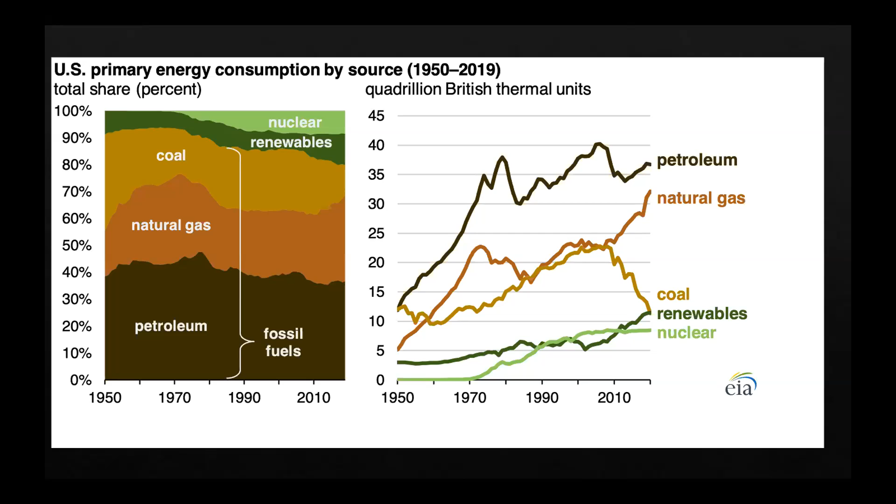I need to find some more current information. But again, you can still see that renewables are a fraction. The good news is, look how far coal is dropping, coal is starting to drop off. But we're still fairly dependent on petroleum and natural gas to have a sustainable and regular use of energy.

And this is where we are today. We all know this. Power plants are using petroleum, natural gas, those sort of things to create power. And as we just experienced this winter, dependable power.

There's been a lot of conversation, and you hear it on the news media and around the country: Texas has so much dependency on renewables, that's what it was, it was the renewables that failed. No, well, yes, our renewable sources in terms of wind did fail. But the reason the wind failed had nothing to do with the technology of the turbines.

It had everything to do with deregulation and the fact that the producers were not required to provide winterization. That's why valves froze up on the natural gas pipeline, and that's why the turbines couldn't run.

It's just like an airplane wing - the turbine blades ice up, you have to shut them down. They start to cavitate, and the next thing you know, you've got turbines falling to the ground. So they had to shut them down because they were icing up.

Now, I don't know if any of you have been to Copenhagen, but they have a line of wind turbines that go all the way out Copenhagen Harbor. And that harbor is subject to temperatures as extreme as what we experience, perhaps more. They don't have any problems. Well, it's because they have winterization on those turbines - it's called de-icing. So it wasn't the technology that was the problem.

It was the fact that deregulation allowed the producers to say, well, we've never had a freeze, we don't need to provide winterization. Well, we just had an event - I think it was maybe a 200-year event - but the point is we had an event and things froze.

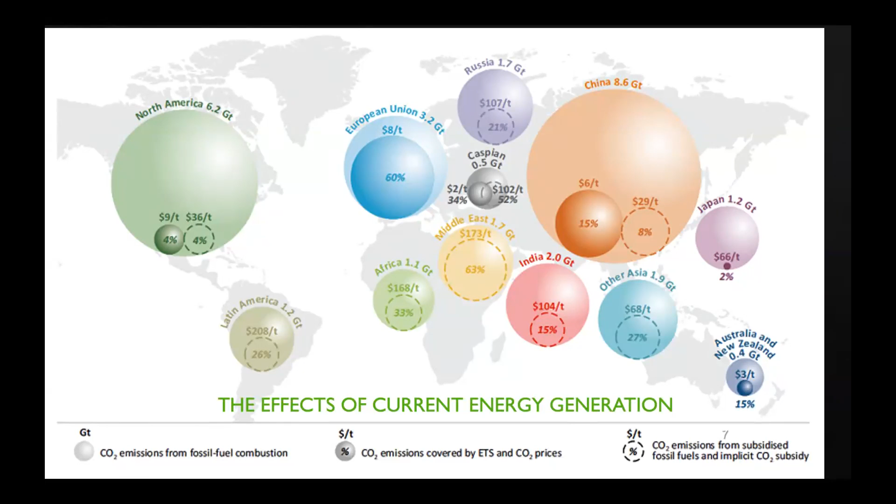So the effects of our current energy generation, this gives you an idea - this is CO2 emissions around the world. And you start to look at this and it's even larger now. You really get a sense of what is going on with all this CO2 we're pumping into the atmosphere. And you can see who the biggest players are - clearly China, the United States, European Union, Russia, and India are the biggest ones.

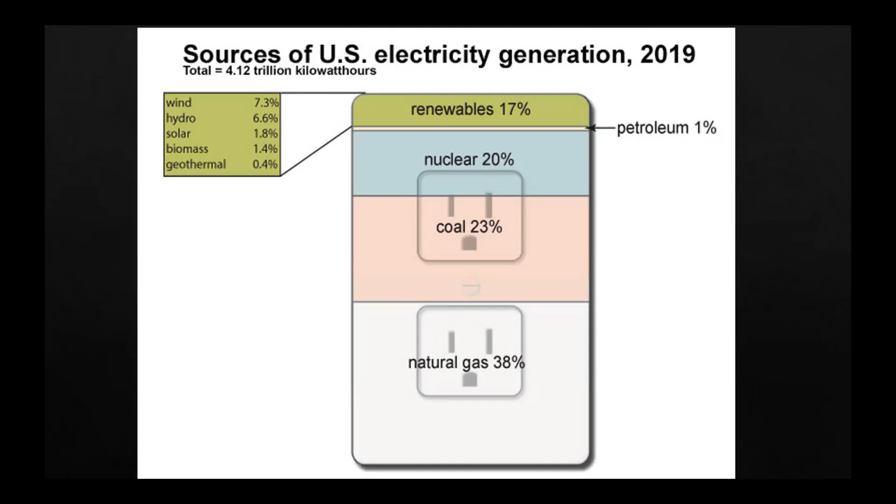This is still a 2019 piece of data, but the renewables have popped up - you can see we're up to about 17%. I think I read a couple days ago we're like 18.5. Nuclear is pretty much the same. Coal, again, is dropping, and natural gas and petroleum sources are still pretty significant.

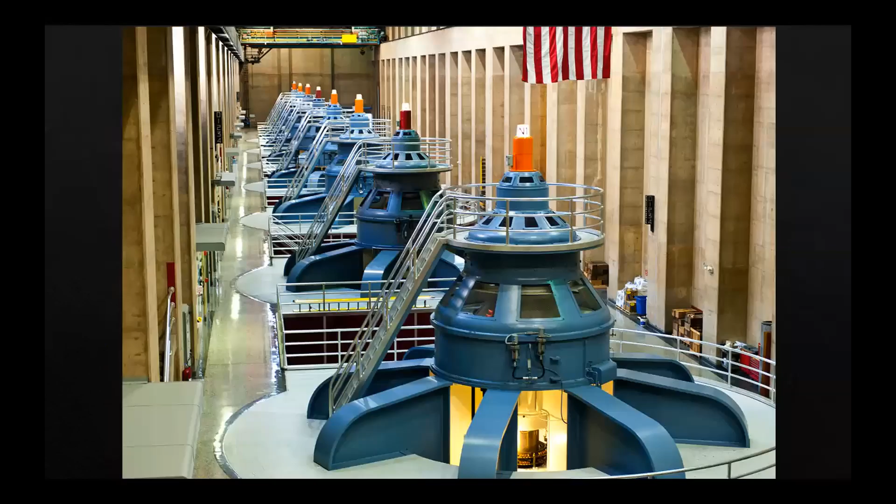So the promises are renewables - renewables can lead us to an interesting future, can lead us to a cleaner future. Oh, go back. Hang on, there we go, now it's working. So the renewable horizon, I think, is important.

When we think about it, for the last 55,000 years, the human race has been primarily challenged by and focused on producing food and clean water. So in the last 200 years, we've created all this wonderful technology, the Industrial Revolution, and we've powered that with fossil fuels. Exponentially, our population is growing, and exponentially our energy demands are growing, and our technology for renewables isn't moving as fast as we'd like.

But the good news is, I guess the best news is, it gets a little better every day, and we have to stay focused on that.

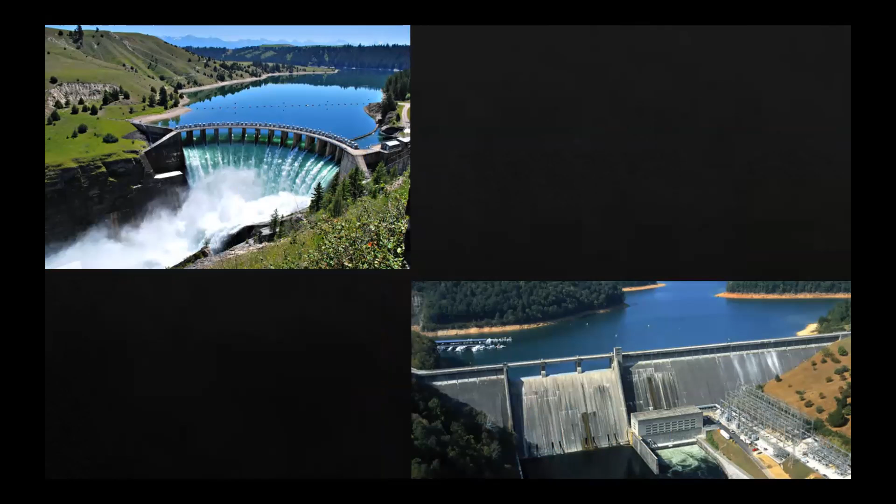Wind, as I shared before, is tremendous. Hydroelectric energy is great too. Each of these has challenges. With hydroelectric, we're disrupting migration patterns of aquatic life, and we're causing some downstream problems. Again, we're learning as a species how to generate power using hydroelectricity in a way that's not as damaging, and this is how we do it.

I read an interesting note the other day that Frank Lloyd Wright was an adopter of technology. He burned 3 houses down because he didn't understand electricity. But the neat thing about Wright was he actually had one of the first electric generators powered by water. He had a fairly large mill creek that ran next to his home. He built a mill pond and installed an electric generator, one of the first in Wisconsin. He'd love to go out and putter with that generator to keep the electricity going. I thought that was a pretty fascinating thing about Wright.

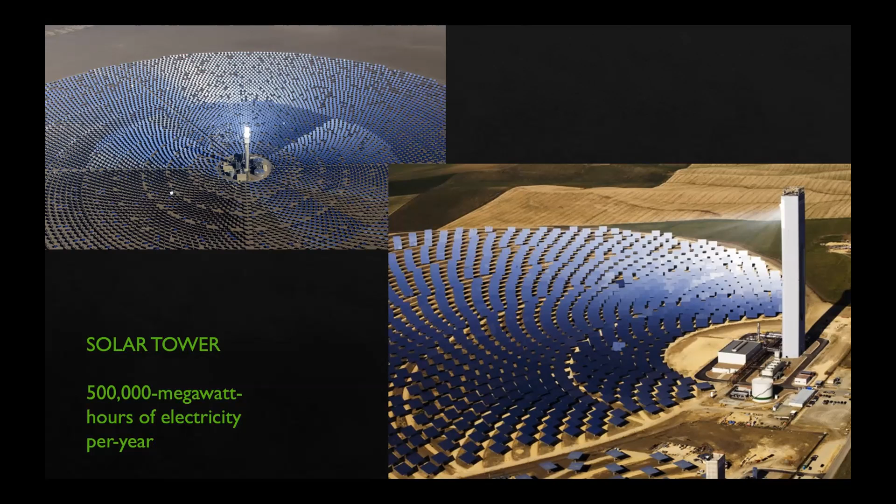You can generate electricity, but again, let's talk about what that does to the wildlife. The desert's not dead - there's a lot of life in the desert, a lot of biomass. So that's another consequence of thinking along those lines.

Nuclear is certainly an option. It's clean, though there's of course debate about that. I heard a presentation from a 4-star general very involved with the nuclear energy commission, who told me about exciting developments - new reactors designed that can virtually use the waste fuel already stored, incredibly safe, with very little fuel, and they can create energy. But the public consciousness is so against it. These are just models on a drawing board, and the funding and regulation hurdles are significant.

So we're hearing a lot about this today as we get into the future of transportation, which is EVs. EVs are everywhere - you hear it from Ford, GM. This is a revolution to move away from gasoline for personal mobility on a scale that's phenomenal, almost as phenomenal as smartphones. But again, when I talk about that exponential energy demand growing every day, EVs are great, but how are we going to provide the power? We still have to plug this thing in.

You talk to people getting an electric car and I'll say, hey, that's great, I think EVs are great, I have one. But do you ever think about where you get the power for these charging stations? Oh, well, you just plug your car into it. But how do we get the power to these charging stations?

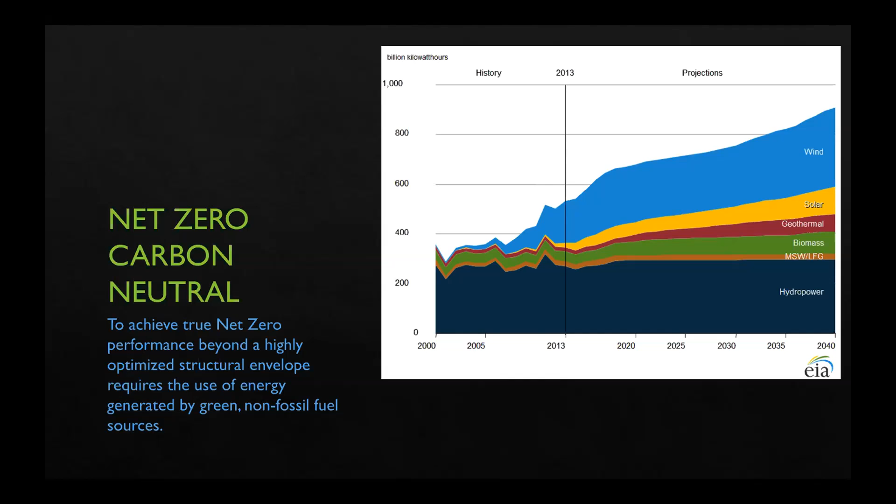This is another chart that gives you an idea of the projections. Here's 2013, you can see 2040, and you can see wind taking a bigger role, solar incrementally increasing, and then the rest, hydropower. This is just renewables.

So the reality of all this means it's probably one of the most exciting times to live in. We're looking at how do we create energy in a clean way? How do we make renewables work? How does this all fit into an equation where we can address the exponentially increasing demands for energy? It's going to require much, much more than renewables. Energy independence, eliminating fossil fuels, reversing climate impact will require a holistic, sustainable approach.

People talk about this, and I love this shot, growing trees for the future. It's a little tree farm that I have, and we grow some trees. Trees are great. I think we can plant lots and lots of trees. That'll help us offset climate change. And again, it's something very simple most people can do.

But trees aren't the only answer. They sequester a great deal of carbon, but so do the oceans, with detrimental effects. But grass, just grassland prairie, sequesters more carbon than even trees do.

It's an effective approach to sequester carbon, a way to try to mitigate climate change. But what is it? It's not a solution, it's a Band-Aid. What we're trying to do is plant trees, lots and lots of trees, to mitigate, sequester, and store all of the carbon we're dumping into the atmosphere by burning things.

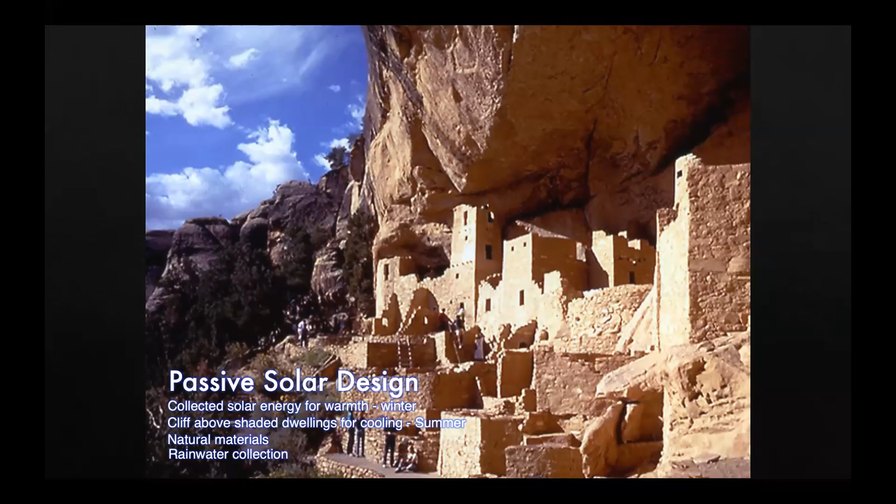So they basically ate the environment away, and they cut all the timber to build these roof structures and for cooking. They altered the environment to the point where it could no longer sustain the population. So while they were natural geniuses in terms of heating and cooling, water collection, on the other side of it, bad farming practices, harvesting practices, and lumber foresting practices destroyed their civilization.

The thing that I always talk about is, where is the sun? Some of you may already know this, but passive solar design is knowing north, south, east, west, shading, natural ventilation, daylighting. All of these things can reduce the amount of energy it requires to heat and cool a home or light a home tremendously.

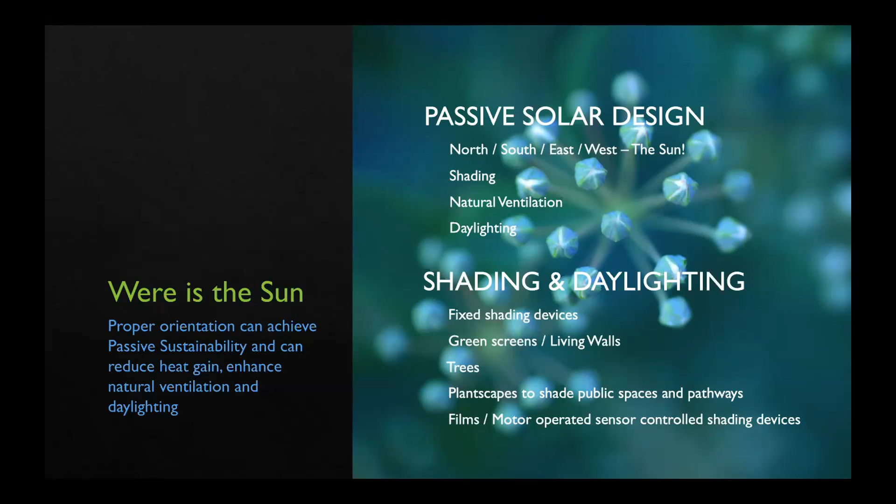Shading and daylighting are tools in my tool bag - fixed shading devices, green screens, living walls, trees, knowing where to plant trees, plantscapes to shade public spaces and pathways. How many of you walk across a parking lot to go to class or work, and you cook? Your shoes get hot because you're walking against a gigantic thermal mass that's collecting all that heat.

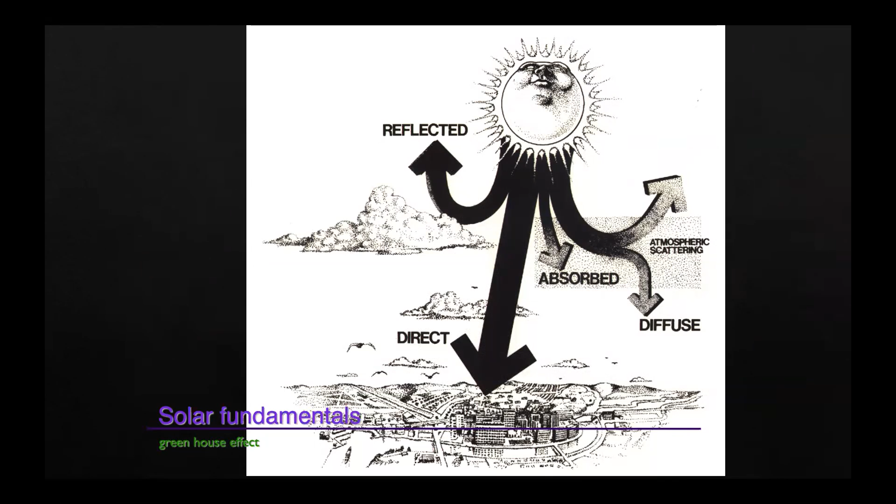This is pretty simple stuff, we all know this - sun shines, windshield heats up, cars burn when you get back in. Sunshine is kind of diverse - some of it's direct, some is absorbed, some is diffused, some is scattered, some is reflected. Knowing how much you can collect and how much you can reflect, and how all those things impact us, is where the engineer or scientist part comes in.

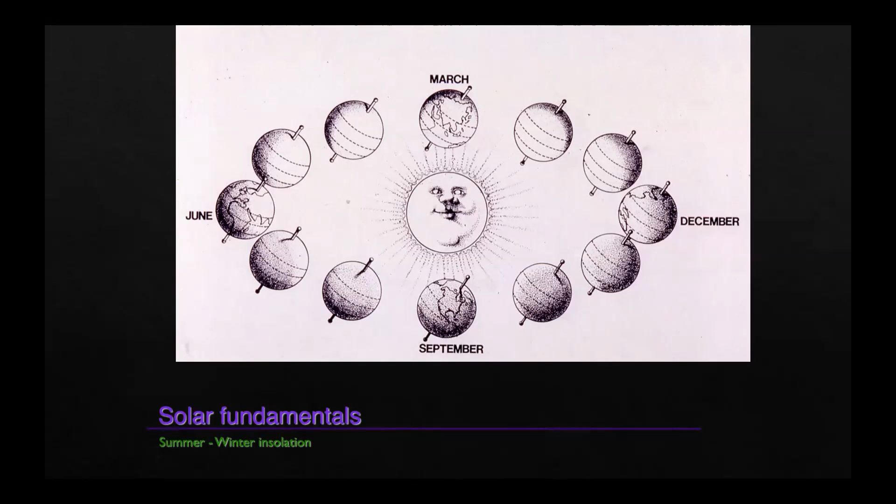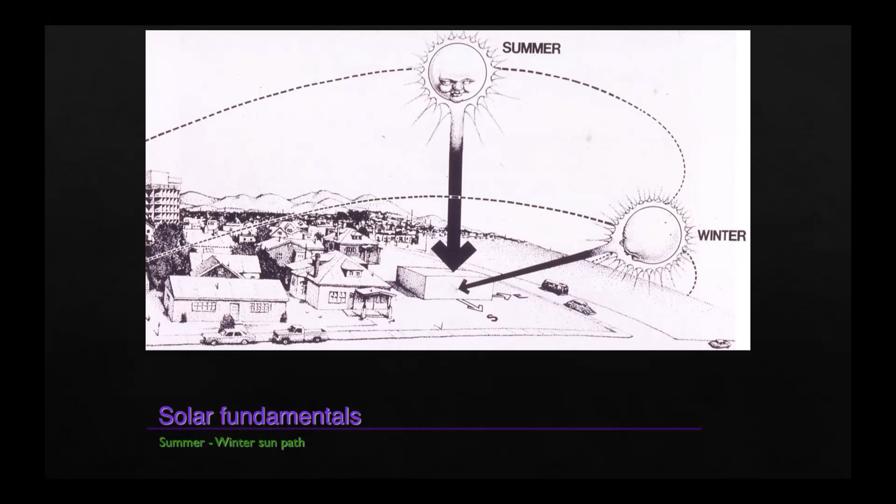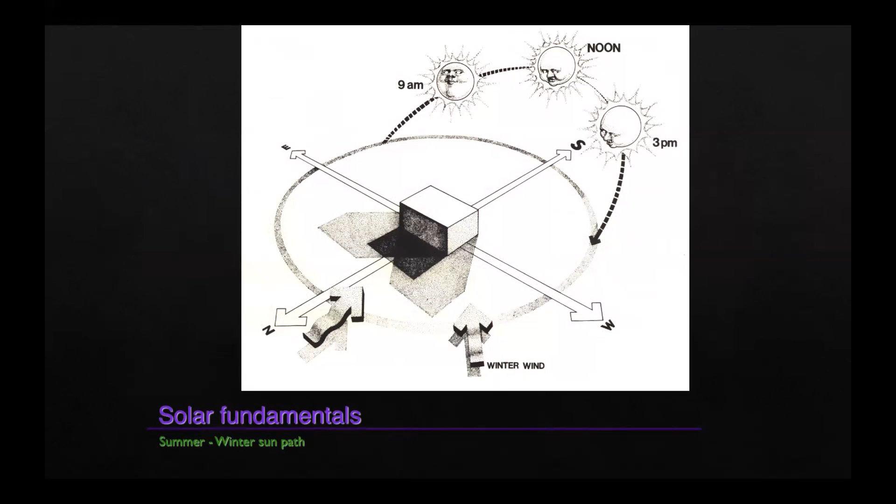This is the simplest diagram you'd ever see in terms of what happens with sunshine and how it impacts our built environment. If you pay attention to what the sun does - where is it in the sky, how high is it, how far does it reach to the right and left, where's shade and shadow - the sun is effectively a constant, and that's what we use to work with our buildings to reduce the amount of energy required, have better daylighting, and mitigate the interior environment.

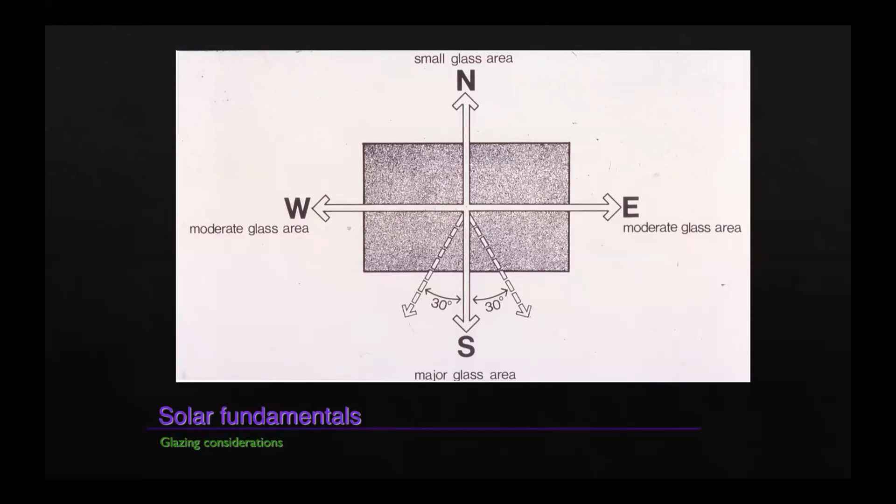This is probably very rudimentary, but it's true - you put a small amount of glass area on the north, and this works in the northern hemisphere, it's reversed in the southern hemisphere, but it's the same principle. You can see where you put moderate glass, and where you put a lot of glass.

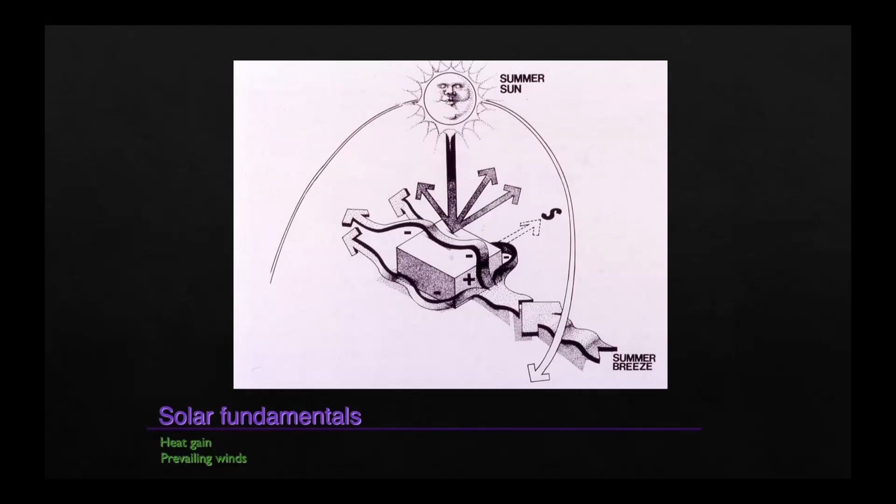These are the other impacts you start to think about, like wind. What's interesting is with our built environment, particularly in a dense urban area like Dallas, we've altered the wind patterns. If you go north up to Denton and further, it can be 105 degrees down here because of the heat island effect, and also the wind doesn't move through here. If you go up north, it's a lot cooler and there's a breeze because they've mitigated two things: the heat island effect, and they're not blocking the natural wind patterns.

So put that together for a building, and these are the kind of influences we work with every day: how much heat loss, how much heat gain, how much daylighting.

Pretty simple, really, and this is the simplest concept of all: shading. If you take advantage of the fact that the sun is almost vertical in the summertime, and lays down to our latitude about 32 to 34 degrees in the wintertime, you can use that to your advantage. So if you keep the direct sunlight out of your building, out of your windows, you're not gaining all that heat on your thermal mass. And in the winter, you let it in and warm it.

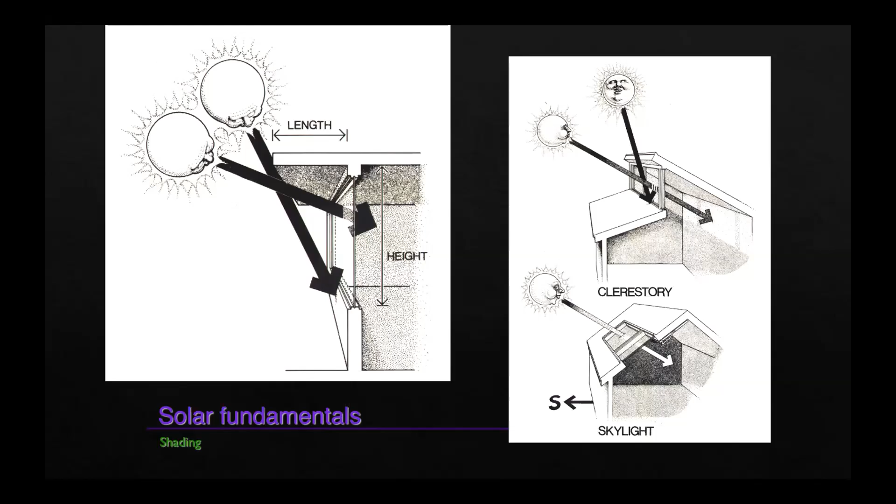Some technologies work better in certain climates than others. For instance, in Dallas, skylights are horrific. You just can't control the amount of heat gain that comes through skylights. I love skylights, but they're a very difficult thing to use. There are technologies we employ that do work, but north of us, north of the Mason-Dixon line, skylights are great. Here, what works better for us are clerestories. So very simple, very basic techniques.

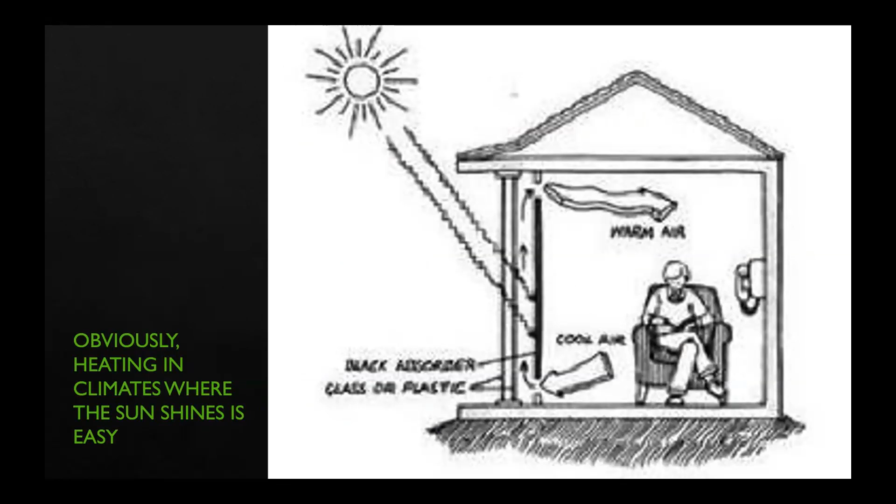So in climates where the sun shines, heating is easy. This is basically a sketch of a trombe wall. Sun comes in, passes through the glazing, just like your car window, hits a heavy thermal mass, and you get cool air coming in the bottom, warm air out at the top. It's called a trombe wall.

The other thing I want to talk about, and we'll go back to the trombe wall in a minute, is Iceland. When we talk about renewable energy, Iceland is on the verge of being completely energy independent with a renewable source, and what is it? It's geothermal. This is the Blue Lagoon. If you've never been there, I recommend you go. You can move around in the Blue Lagoon. Some areas are so hot you can't even go into, and other areas are just amazing.

They have these hot pots all over Iceland, and I visited several of them. They're really fun. The benefit Iceland has is sitting on three major tectonic faults, giving them the tremendous advantage of tapping into those faults where you basically have magma down there, and they have hot water geothermal vents everywhere. It's pretty amazing to see they generate virtually all the electricity for Reykjavik and the other major cities from these geothermal sources. It's wonderful that Iceland has that ability.

But here in Dallas, we're not sitting on any tectonic faults, so we really can't take advantage of it. But again, what are they doing? They're not burning anything, but the core of the earth is so hot that they produce steam a different way. They tap the geothermal vent, create steam, and make the turbines turn.

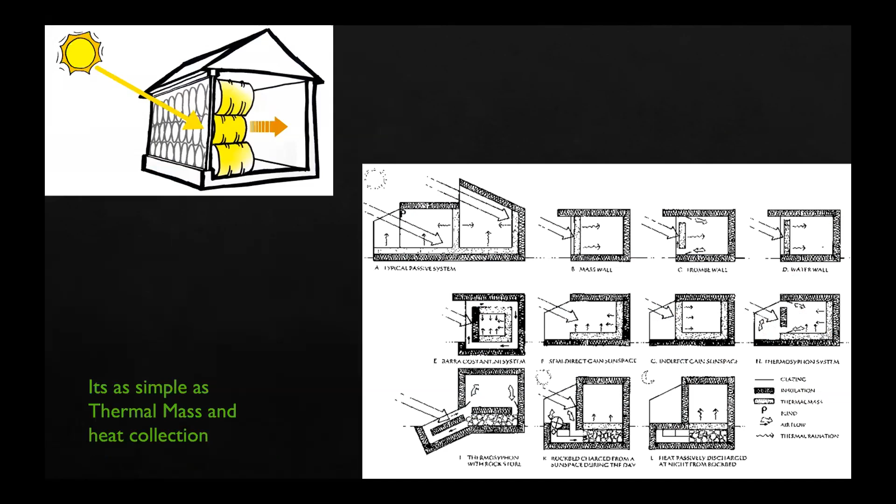So this is the trombe wall I talked about. This is a sketch in the lower right that I've done. When I was much younger, in '77, I experimented and built many examples of all of this. Effectively, here you see it again: it's as simple as thermal mass and heat collection. Works great in cold climates.

The trouble I soon discovered was that the best light coming into your home, the thing that makes a home comfortable, feel good, just a pleasant place to live, is the sunlight and daylighting that comes through the windows. When you put windows on the north, the east, or the west, that's problematic in a lot of climates, depending on what you're doing, and the bottom line is you have to add lighting to light up the dark space.

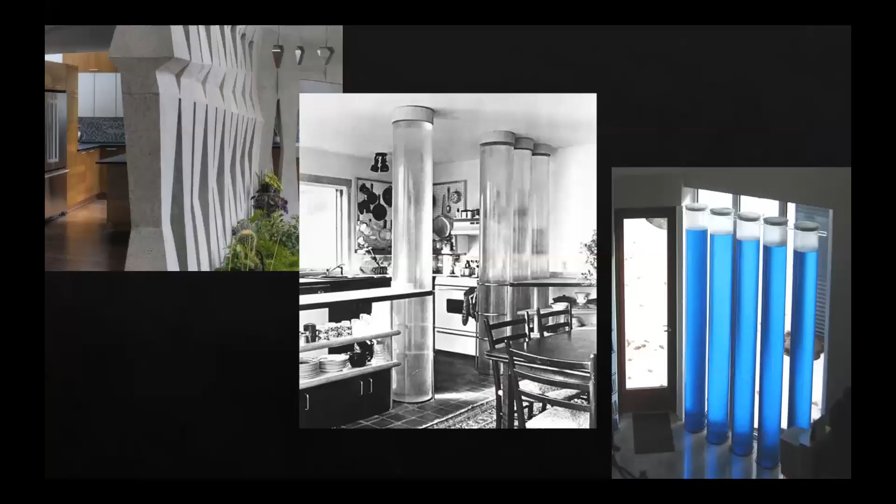This is kind of a hybrid that I did once. I put little glass blocks in the wall, and it worked, but you're still facing that heavy mass. These are some other examples where you can use tubes of water, let the sunlight hit that, warm it up, store it, and reintroduce it.

Now, Amory, I don't know if he talked about it in his presentation, but he talks about how he harvests bananas in the middle of winter at his place in Snowmass. What he has is a modified trombe wall. He has a greenhouse that you see on the left. He collects the heat and uses it to condition most of his lab up there, and he can grow bananas in his greenhouse. Again, that's an extreme northern climate, and it works great.

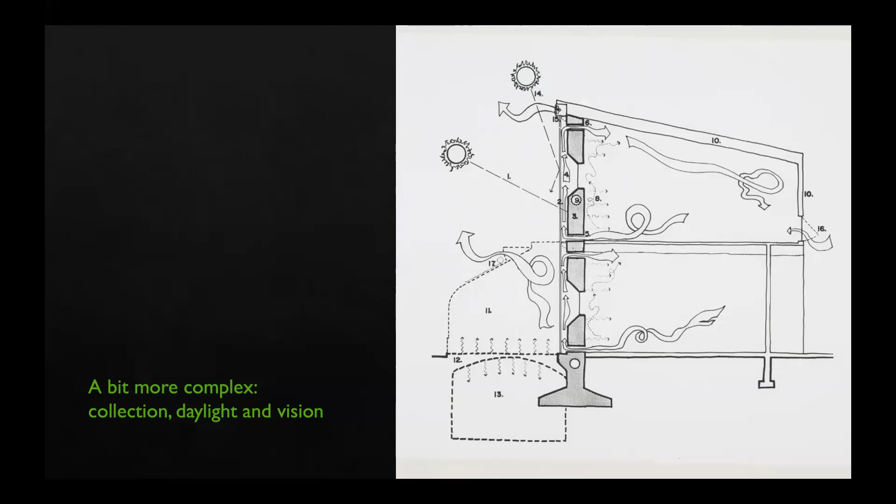Well, we've got the exact opposite problem in Dallas. We have the issue of cooling. We get too much heat. This is something that's pretty interesting, it's a trombe wall, just a modified, more creative way to think about it. You create a thermal mass behind the glazing and use it that way.

Now, some things that we've played with, not to great success yet, is can we collect that heat and extract it out of that wall, doing what's called a conductive cooling mechanism. You put it in a masonry wall or something like that to absorb the heat, or you pump coolant through it to cool it and take the heat out.

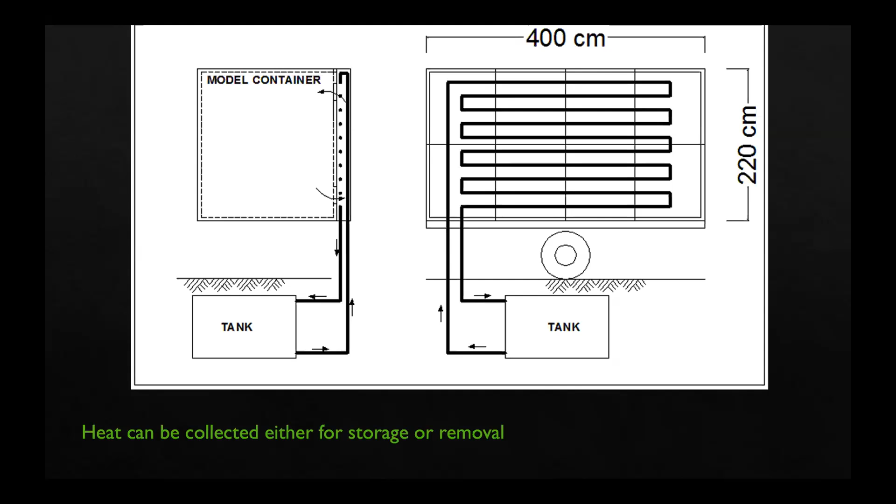Again, this is almost going back to those early days when we were doing solar panels, pumping water through them on roofs, and you had to be a master plumber to condition it. So I think there's opportunity here. We're working on it with different refrigerants, seeing if there's a way that we can actually make walls and floors conductive to extract the heat out of the air.

So when we talk about buildings, and I won't get into too much of this, this is more about the way that we approach a building, whether it's a small home or a large facility. Where we start is baseline modeling, and we really look at that building, how much load, and what do we need to do to offset that load.

You've got to deal with cooling, lighting, plug load, and additionally people load. One of the biggest demands in buildings that you have to offset by generating electricity, again either more solar panels or more energy of some kind, is us. We're little, remember that movie, The Matrix? We're copper top batteries. We're generating heat all the time, heat and moisture.

And so when you design a building, several things impact it. You have to take into account the amount of heat introduced by humans. We're a chemical engine, we're burning food all the time, so we're doing the same thing as we do to generate electricity. We're burning this fuel inside ourselves, creating heat, and then we off-gas carbon dioxide.

All of those things affect the indoor environment, along with heat gain and the need for lighting and plug loads to run all our great technology, like our computers and smartphones. So one of the things we've done recently in buildings is the building codes are catching up pretty quickly. You had to provide, I think it's 16 or 17 cubic feet per minute of fresh air introduced into a building. Again, I'm not an engineer, I hire my engineers to do the numbers for me.

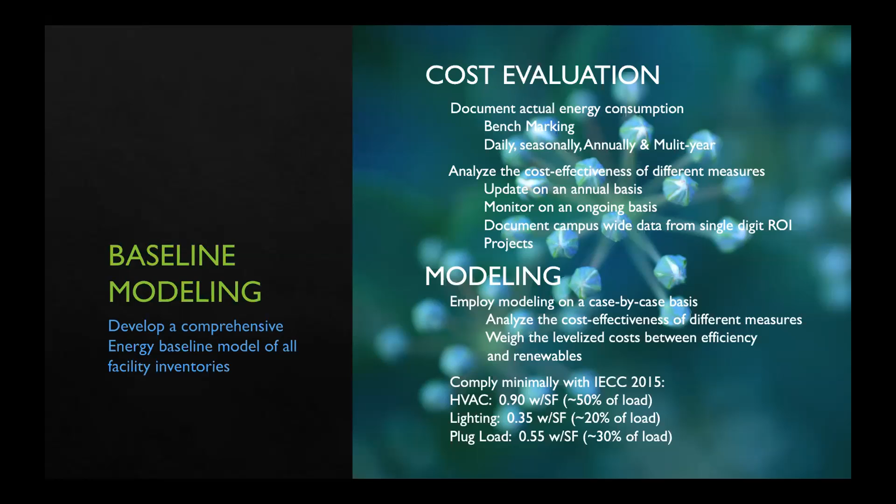So that is one of the biggest loads on any building, fresh air. If you can modulate that with controls and smarter systems, what have you done? Well, you've reduced the energy demand of that building. Now you don't have these units sucking in all that energy to create all this excess cooling to dump fresh air into a building where it isn't needed. So it's about getting smarter.

Insulation - we still don't properly insulate our buildings. We've come a long way, there's a lot more technology, some great new products on the market. I have been wrapping my buildings with a full 1 to 1.5 inch rigid insulation on the outside of the sheathing to create a completely sealed envelope, because you still get conductivity that moves through the framing and the walls.

You'll find even today, I run into old buildings that the city owns or private clients own, and I'll go up on the roof to see how much insulation they have. None. They've got what's called a recovery board - it's like a 3/8 inch to a 1/2 inch board laying on top of the steel deck, and then generally a dark roof sitting on top of that.

One of the things we've been doing for a lot of our clients is when they have a need to re-roof, we pull the roof off, we put R42 minimum on the roof, and then we use a white TPO membrane. That alone reduces the energy demand by tremendous amounts.

70% of the heat gain that goes into a building comes from the sun. So you can start to see that when you talk about things like reflective roofs, cool roofs, living roofs, insulation - all those things can reduce the amount of energy a building needs.

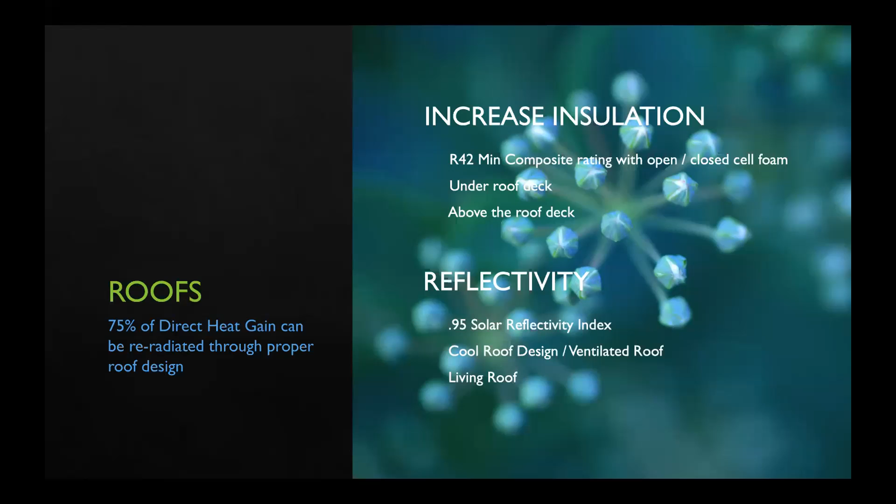So if you do that for one building and reduce its energy demand by, say, 75% - on residential projects we have pretty good luck reducing it down to almost 90% compared to a standard builder tract home - then when you look at the amount of solar PV you have to put on that roof, it doesn't take much to heat, cool, and power a building that's that efficient. Whereas the other building that's not efficient, you can imagine you're paying for a lot more panels, trying to generate a lot more electricity, consuming a lot more electricity.

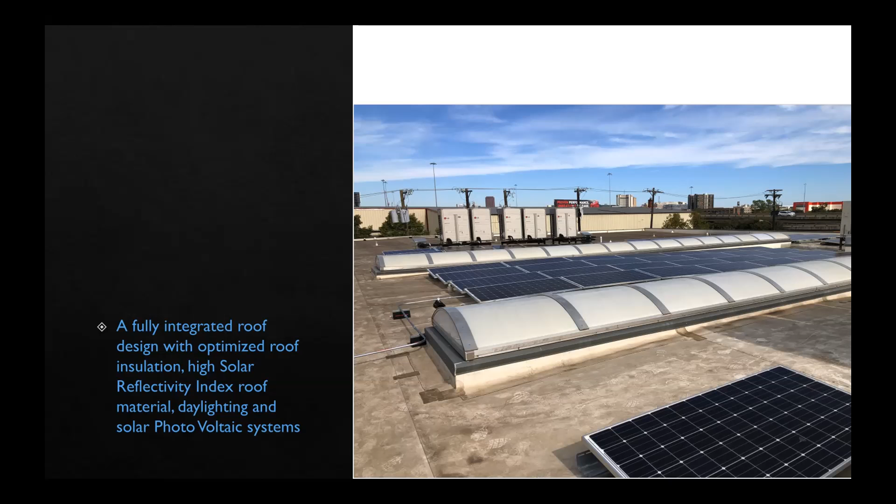We put an R46 roof on this, sitting on top of the concrete deck, then used a highly reflective membrane. That's one of the reasons we were able to realize a lot of the energy efficiency in that building.

Here's another aspect, something pretty important and pretty easy to do really, and that's living roofs. If they're done well, the darn things don't leak - it goes back to detailing, it goes back to craftsmanship, all those sorts of things.

The plants are actually absorbing it and then releasing it at night.

The other nice thing about living roofs is when you think about it, if you were a bird or a butterfly flying over the city of Dallas or any major city, you'd look down and all you see are these hot roofs with mechanical systems where there once was a living mantle of the earth. Every time we carve out a piece of that living mantle and put a hard surface there, we're exacerbating the heat island effect, creating another surface that's just going to store that heat.

Again, it's a trombe wall in the atmosphere. We're storing that heat. Well, where does that heat go? It only has two ways to go—it needs to go up or down.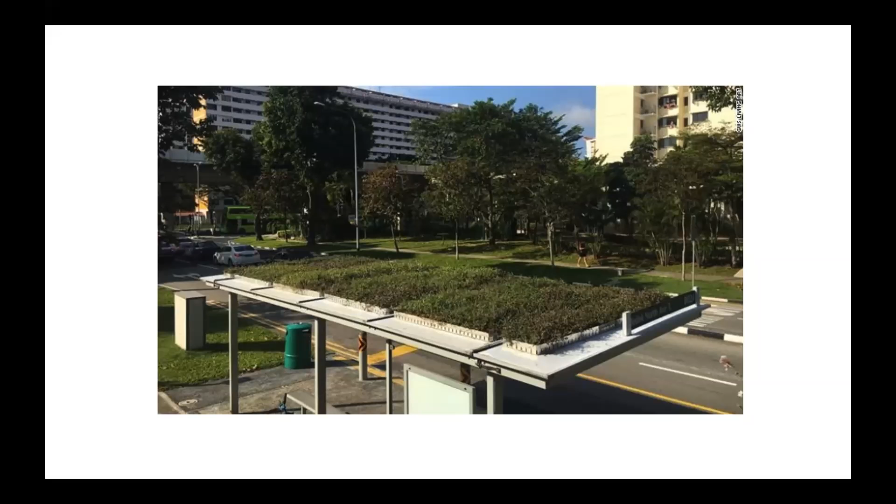Innovative things like this—this is just a little bus shelter with a living roof on it. This is, if you've ever been to San Francisco, I think Golden Gate Park—again, another living roof with skylights, and you can see the shading effect all around the building. Very efficient building. So these are some of the specifications that we use.

And I think over time, as technology improves and we get better glass performance, the U value and things like that will increase. We generally use thermally broken frames, which means there's no conductivity from the inside to the outside because there's a thermal break in the middle.

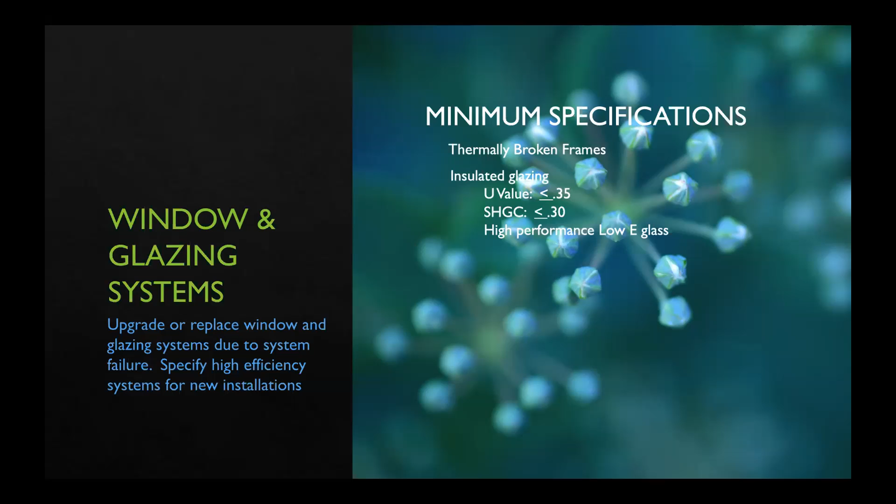When you look at a window frame, for instance, you would be shocked by how much heat goes out of your building in the wintertime through those frames, and how much heat comes into your building in the summertime through that effect called conductivity.

This is very simple, and this is recorded so you'll be able to grab this. This is a chart that we perfected over 30-plus years of doing this, on how to control sunlight to get the minimum heat gain in the summertime, maximum amount of indirect daylighting, and also maximize your heat gain in the wintertime.

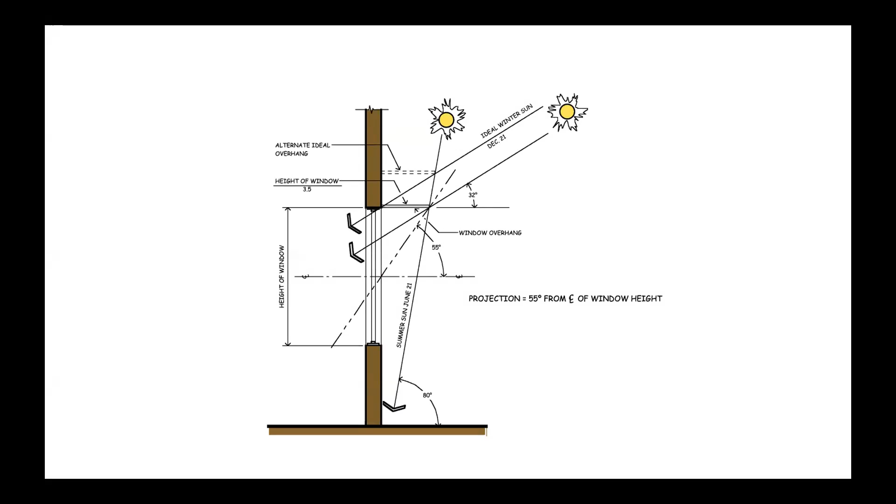My home in Dallas, for instance, just to give you an idea—I'll talk about this building shortly. When we had the big freeze here this winter, everybody in our neighborhood left. Power was off, and people couldn't keep their houses warm; it was just unbearable. Well, my house is a passive solar home built with insulated concrete forms. I have a crawl space underneath the home that I use as a plenum space to heat and cool.

I have masonry floors, I have tile. So what happened—when the sun was shining, it came through the windows as designed, heating up the floor tile. The floor tile was a thermal mass that was saving that heat and re-emitting it back into the home. We stayed fine—it wasn't 72 degrees, we never got much lower than 64 in this house, just using the sun. And so, you know what, put a sweater on.

One of the things that used to drive me nuts was Pat Summerall advertising for Trane on all the football games. He'd say, 'Trane, it's 72 degrees everywhere.' That's dumb—come on, it's summertime in Dallas, wear a short sleeve shirt and shorts, or it's 10 degrees in Minneapolis, throw on an Icelandic wool sweater. Amazing how comfortable it can be.

Speaking of that, when I was in Iceland, I picked up one of those Icelandic wool sweaters from the Icelandic sheep, which exists nowhere but in Iceland.

And we went out to Thingvellir, which is where they used to have their government meetings. Cold day, 52 degrees, I think. There was no sun shining. It was kind of wet, damp, kind of misty. And so I put on that Icelandic wool sweater. I was toasty, it was so nice. I just walked around with a little rain shield and rain parka and that Icelandic sweater, and it was pretty amazing. So we can learn how to adapt to our environments.

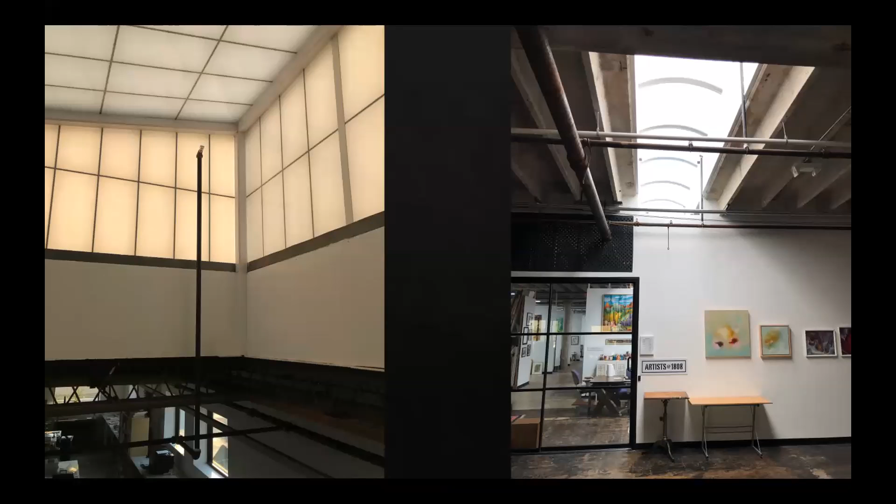In the building I showed you, the 1808 building, this is what we did with the skylights. There was no natural daylighting in this building. There wasn't even a window. We cut it all in.

On the left here, this was the old boiler room. When we renovated the building, we decided not to put a roof over that. We used what's called a Kalwall, which is another kind of skylight system that provides natural daylighting without all the detrimental effects of excessive heat gain. So windows can be used to a great advantage.

This is a south-facing window in that same building, that warehouse we renovated, and it has an overhang. You can't really see it, but this is in the middle of the day, full sunshine, south side, and you get this wonderful diffused light.

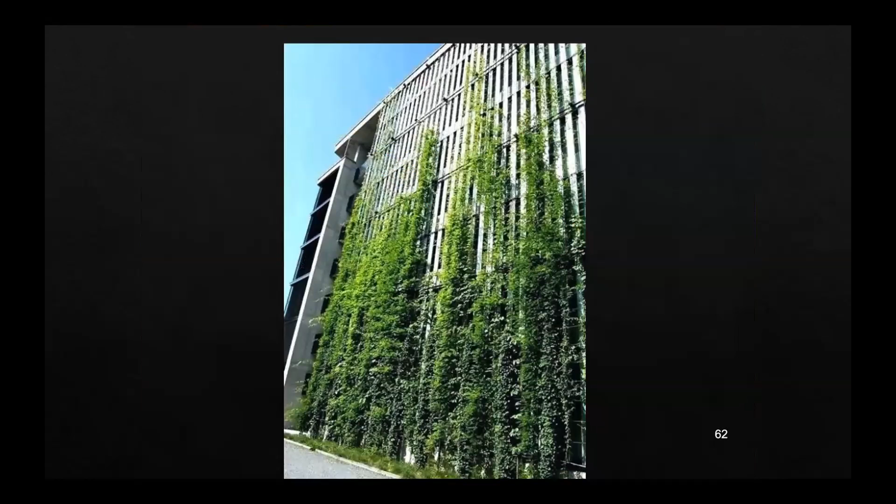What we're doing a lot now is we're playing with this quite a bit. This is one of my buildings, but we're playing with living walls, living screens, and they work the same way. You can do this at your home, you can do this at your office. So what you do is you've got a Western exposure or a Southern exposure, and you can create a living wall with deciduous plants. In the summertime, it absorbs the heat, knocks down that direct sunlight that creates the heat and creates the problem, but it also creates a conductive cooling environment because the plants have evapotranspiration where they off-gas moisture.

What they do is they create this sort of malqaf effect, which is something that was perfected by an Egyptian architect a generation ago. He discovered that he could create these towers and move air through them. In a way, he would create this condensation, and so the hot air would come, move through, pull the air out of the buildings, and cool them down.

Well, we're finding we can do that same thing with these plants. This is nothing more than cables and a climbing vine. Another aspect of this, which is really fun and brings in that sort of biophilic or natural approach to building design, is that in the wintertime, since these are deciduous, they drop the leaves and you get the solar heat gain to heat the building.

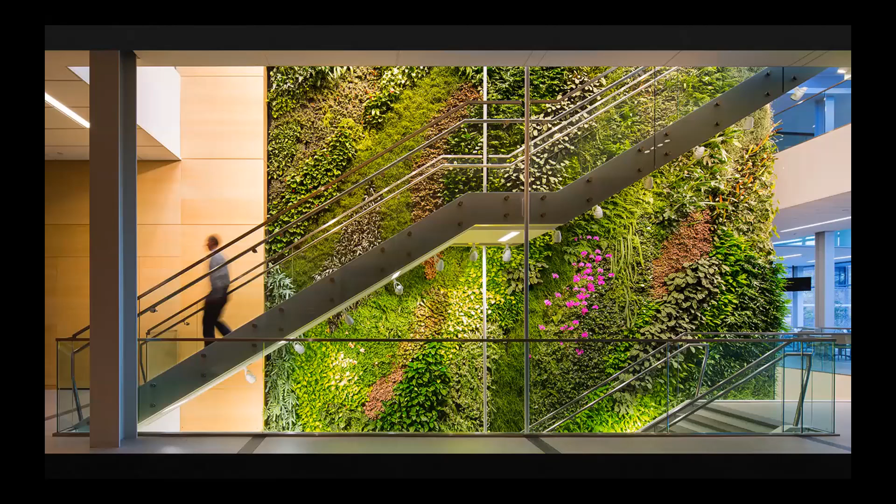Again, what you're doing is reducing the amount of energy to heat and cool the building, which reduces the amount of fossil fuels that have to be burned to generate electricity, which then also reduces the amount of solar panels you need on your building. Living walls—there's a big skylight over this. This is an amazing thing to see. That plant life you see is living and really mitigates the interior environment.

One of the other big things in lighting is circadian lighting. I don't know if many of you have heard about that, but it's true that our bodies, having evolved with the sun, the night and day cycle, that sort of thing, follow what's called a circadian pattern.

And the light in the morning is a different temperature than the light in the evening. So we have evolved to where the wavelength of light in the morning makes us alert, brings us to that alert condition, all this weird stuff our body does that we don't know about, right? And in the evening, the temperature changes again and puts us into more of a sleep state, moves us more to a natural sleep state.

Well, you can play with that spectrum with lighting, to the extent that a lot of sports teams now in their locker rooms are using the wavelength that gets the body stimulated, because they're playing games late at night where the natural tendency would be to shut down.

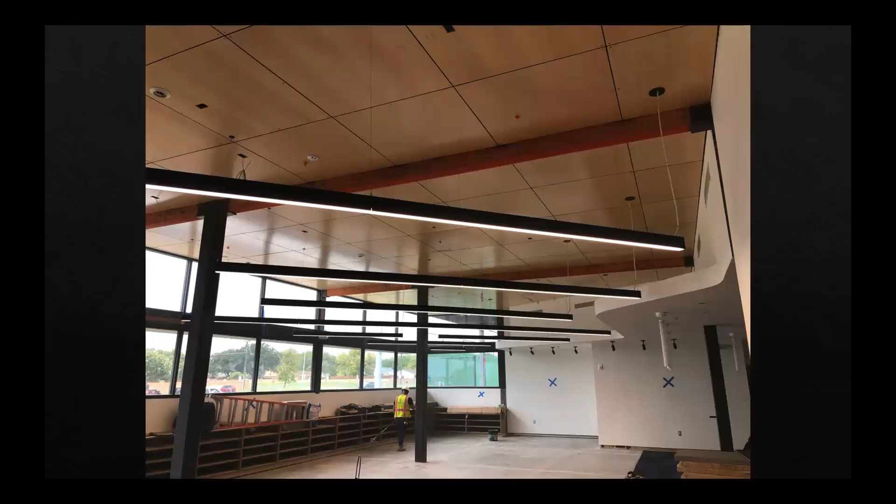This is the Plano building we just finished. All of those, again, are daylit. This is a retail space. Those lights are merely there to provide light when it's dark. But this is a retail space, and now this building is finished. I need to go back and get photographs, but the retail space is lit very well.

This is also a really efficient building. We did a lot of shading, did a lot of insulation on this building. We could not do any PV, there wasn't any budget for it. We used some very sophisticated controls, very sophisticated equipment, and we got this building down to about 47% less energy consumption than a comparable building.

Equipment—I'm not going to dwell on this because everybody's eyes kind of roll when you start to talk about it. But for me, one of the most exciting things is our HVAC systems. It's fascinating when you go into old buildings and realize how old these mechanical systems are, and they're consuming an incredible amount of energy to run. They're very inefficient, the controls are terrible. So you've got buildings that are, again, Amory's great sucking sound, and you're just burning energy that has no purpose. It's just wasted. It's just gone.

So what's exciting is we're starting to look at things where we can reduce the energy demand on buildings just by having more and more efficient equipment. Go back to that—for 50,000 years we've been trying to solve the food equation. Well, now we're working on efficiency equations, and we're working on ways to create much more efficient buildings. So to me, it's exciting. A lot of people probably yawn.

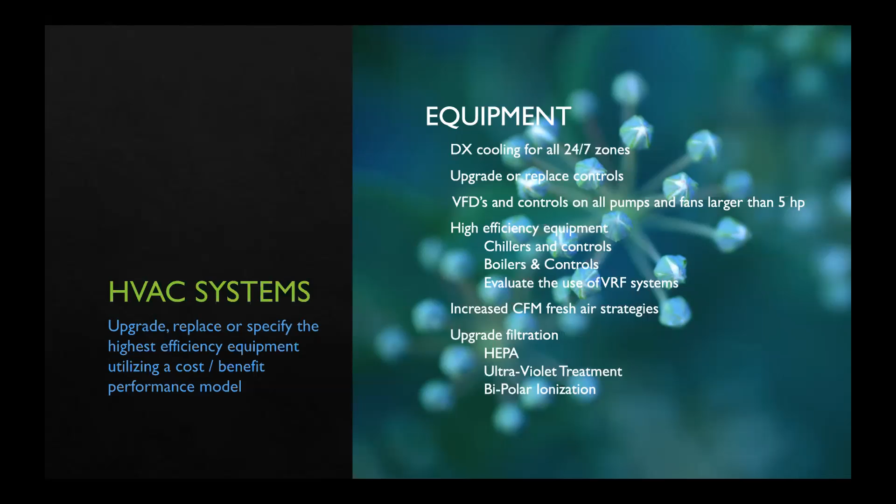A fossil fuel power plant is about 33% efficient. And the trouble with that is you're still dealing with entropy, where you're losing energy in storage and transmission. You're losing energy when you send electricity through wires, because the longer that has to go, it drops off. It's called entropy, where the energy converts from electrical energy to heat energy. So transportation is always an issue, and storage is another issue altogether.

But we've come a long way. A lot of industrialization was based just on water power, and I think that's pretty exciting.

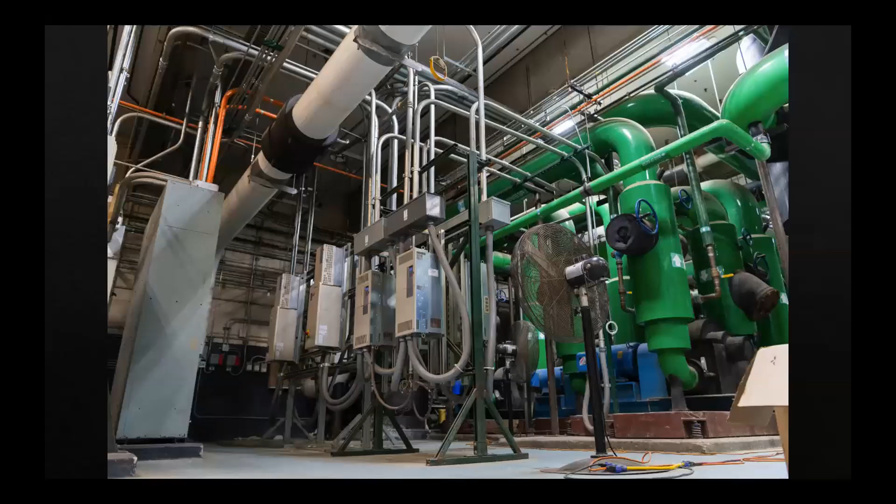But from this to this, you're starting to see these new facilities at the University of North Texas that we've been working with, and you can see the controls. You can see the big straight piping, not a lot on the water side and the steam side, not a lot of bends. And it's almost art in some ways.

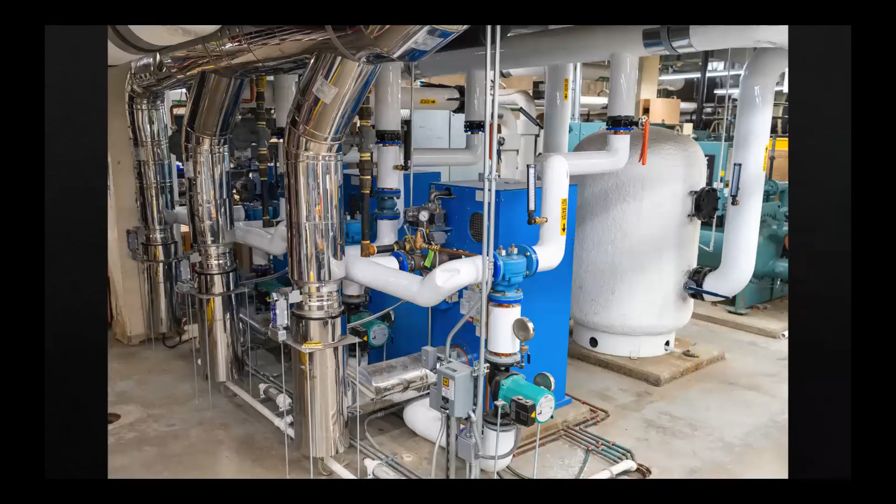This is a thermal storage tank, an experiment they're doing where they're trying to store thermal energy—actually chilling water down at night and storing it in these tanks, which are highly insulated. That's been done for a while.

Minneapolis, the University of Minnesota, I think in the early 70s, built buildings where they had these big ice vaults, like during Jefferson's time. In Jefferson's time, they built an underground building with timber, like an underground tank of timber. It was called an ice house. They would cut ice from the river all winter long and store it in that ice house, then bring chunks of that ice into the house in different ways to cool it. Pretty ingenious—he was a pretty smart guy.

He came up with ways to bring that ice in and provide some cooling, but also for mint juleps and whatever else. But it's the same concept—the University of Minnesota did the same thing. They chilled water in the wintertime, froze this vault of water, and then used it for cooling in the summer. To this day, it's still a pretty effective system.

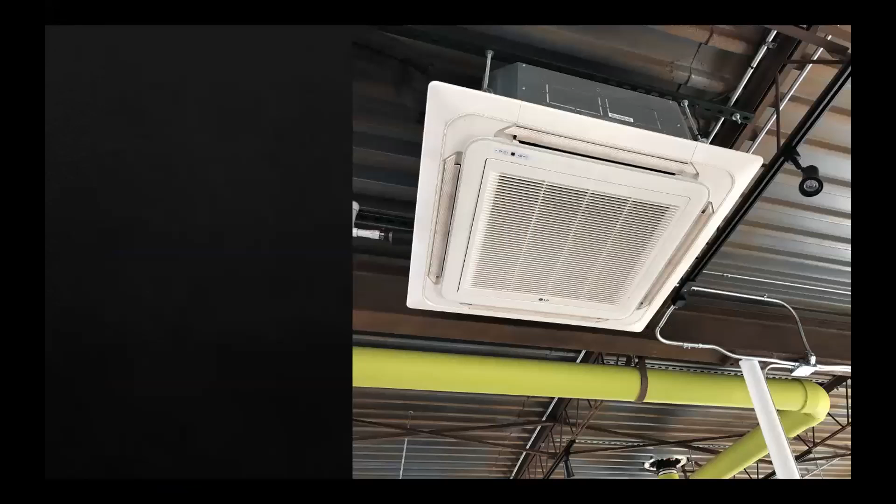These are some new systems, variable refrigerant flow. They talk to each other and move heat from one side of the building to the other, so the energy they consume is very, very little. They monitor the wet and dry bulb temperatures—you can dial these down to where they're just dealing with humidity and not providing any cooling. So these are pretty amazing. They're all interlocked. Weatherization—this is one of the biggest things.

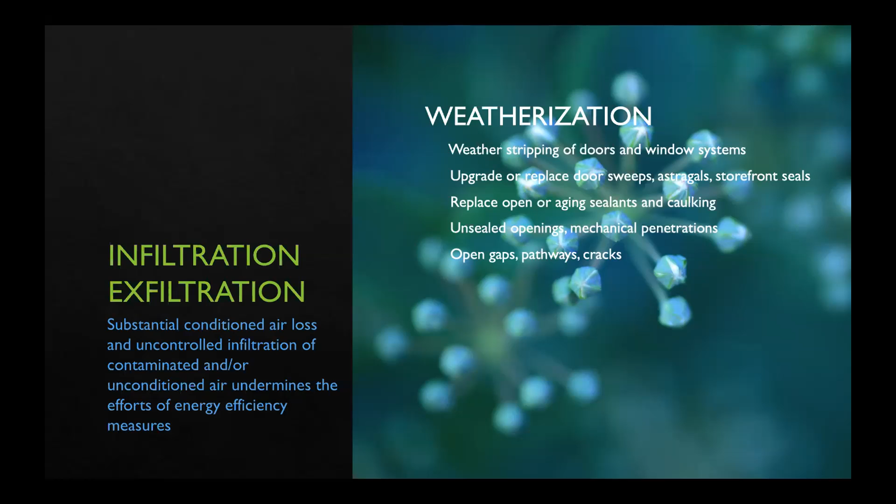If we just did things like weather stripping on doors and windows, upgrade or replace door sweeps, replace aging sealants, unsealed openings, mechanical penetrations, gaps, pathways, cracks - the amount of exfiltration and infiltration in our buildings today is just phenomenal. That alone saves a tremendous amount of energy. It's that great sucking sound. We're using energy for no purpose.

Software - this talks a little bit about the controls. I'm just going to gloss over this, but one of the great and exciting things for me is that we now have better and more sophisticated controls, thanks to microchips, where we can control everything: CO2 management, economizer cycles, optimize sequence of operations, all those sorts of things. Maintenance sounds silly, but just cleaning your coils, changing your filters makes a huge impact. Checking your refrigerant loads, looking for leaks.

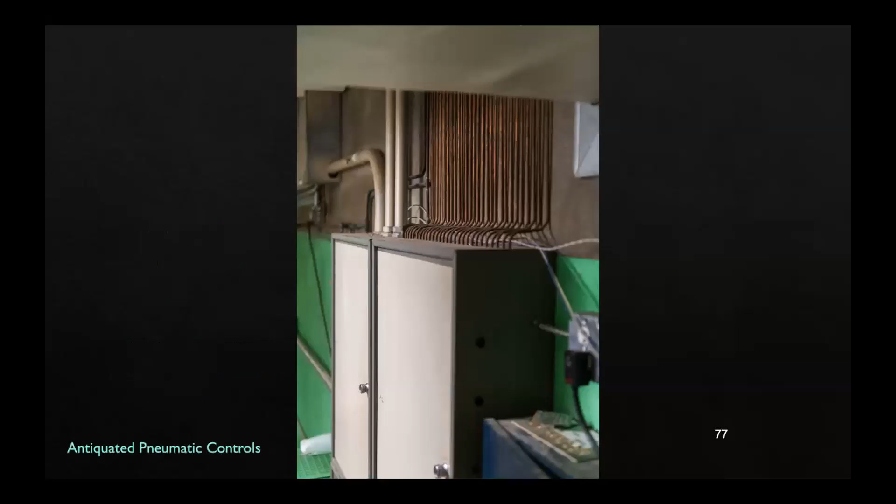I did a project in Laredo, Texas. It was a big project. The building got fired up, and I got a call from the building manager at the end of summer - they were having problems cooling the building down. So I flew down there, went up on the roof, and took the panel off. I had the mechanical guys there, and we took the panel off the air conditioner and tried to get the filter out, and we couldn't. The filter was an adobe brick.

The cooling coils, the condensating coils - there's a lot of dust in Laredo. So you've got wet copper coils trying to condense the heat and expel it to the atmosphere. They're sweating, dust is blowing on them, and they actually created adobe bricks. We could not even get in there. They had to dismantle the units, and the filters came out as bricks. Then the coils were shot. I asked the maintenance man, 'When was the last time you followed the maintenance schedule to come up here and pressure wash these coils every two weeks?' He said, 'I've never pressure washed them.' Well, there we are - that's part of the problem.

So maintenance is a big deal. Going back to controls, this is an interesting shot - for me, it's aesthetic, it's beautiful. These are called pneumatic controls. The piping is so precise. It's straight, all the angles - look at that. All the angles are the same. It's just amazing. But these are the old controls.

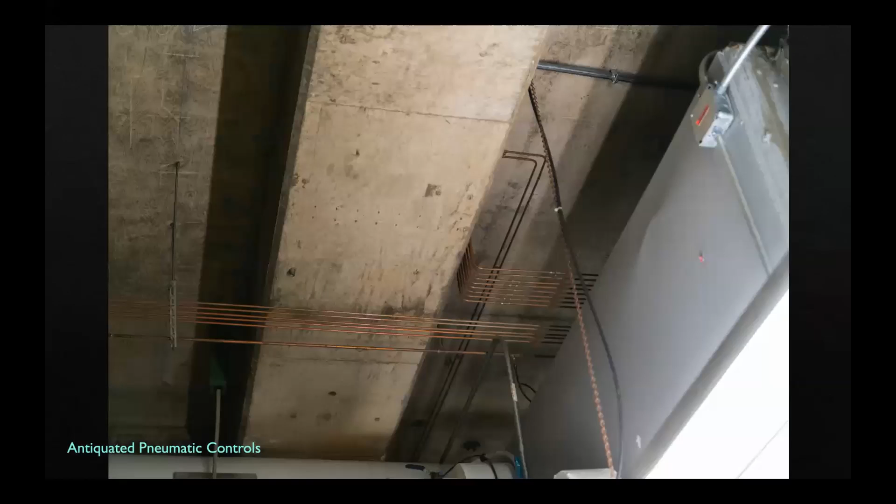These were in the 70s. These were the cat's meow. This is how you controlled zones, how you controlled valves - all replaced now by microchips. But I find them interesting in that this is a technology that's gone, but you still find it in public buildings and major buildings everywhere. When you look at it from today's perspective, these things are incredibly inefficient - they're just inefficient, but they're a beautiful work of art. I mean, I can't get a plumber to lay a level pipe for a waterless urinal, and yet look at the craftsmanship that went into this.

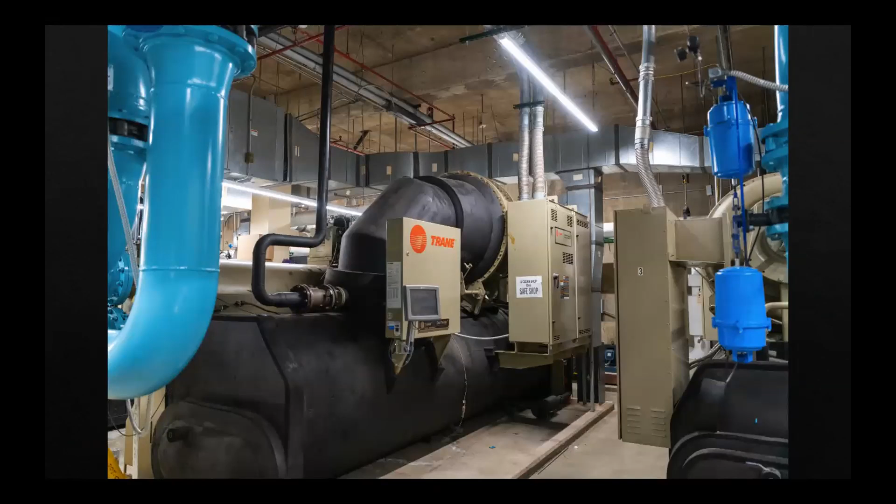Again, more of these controls - this is the sophistication we're looking at today, and this is what's helping us really reduce the amount of energy we're consuming. This talks a little bit about daylight harvesting sensors, occupancy schedules that match calendar and program use. These are all little things you can do, but they save energy incrementally. I talk a little about biophilic design, diurnal lighting patterns - occupant behavior plays into this whole concept of reducing energy consumption in a building.

When you look at what I've just shown you holistically, you can see that you can reduce the energy demand of buildings down to something very small. Hopefully in some ways it can offset the exponential growth in power generation we're going to need for EVs. So they kind of work together, synchronously, to create the kind of efficiencies we're looking for.

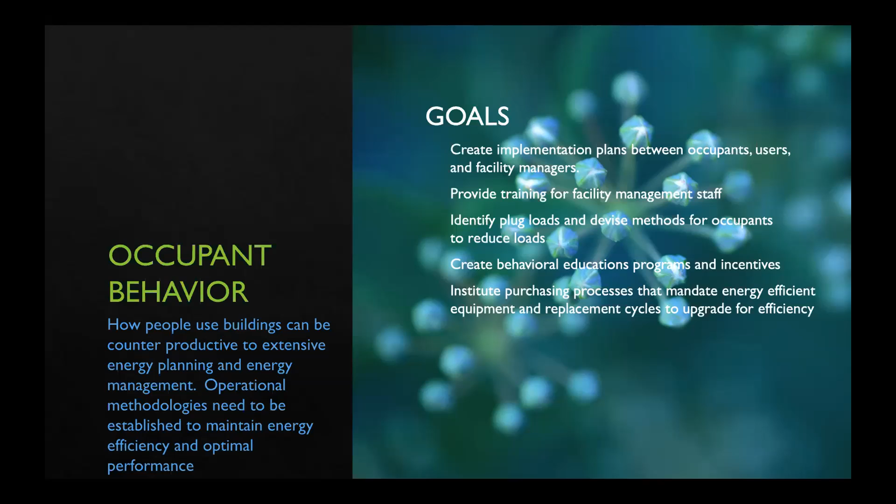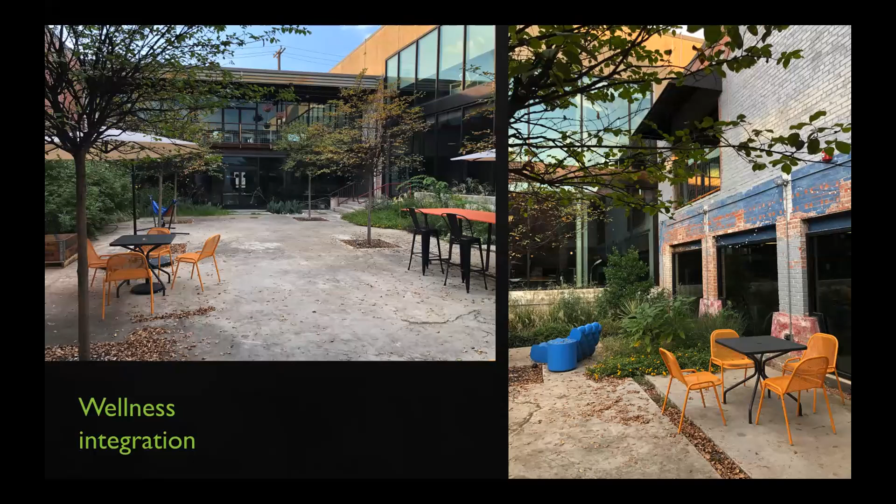It's fantastic. And then wellness integration - that's the other aspect of this, which is thinking about how we design buildings so that people can get out of the space and go outside. It's a healthier environment to work in. If it's a healthier environment, they're going to be more aware of a number of things that affect the way they feel in the space and how they use it. And surprisingly, it does have a contribution to energy reduction.

So it all comes down to this: integrated design, where you start to think about designing buildings and energy systems that support those buildings in a holistic way. And this is the way that we're going to move. We're going to move through this middle ground from where we are to where we want to be in terms of net zero and a 100% renewable energy generation. And it truly is science, engineering, design, architecture, holistic thinking. And it's those kind of things.

It's just little things. A goofy example: when you walk across a parking lot and you see a crushed Coca-Cola can, or a Red Bull can, whatever, if you recycle that can - and I've been saying this for a long, long time - it's the equivalent of operating a big screen TV for 6 hours. That's how much energy you save just by recycling that can. So next time you go to a gas station, you look down in that trash bin and it's full of crushed aluminum and bottles and all that sort of thing, there's where you can also make an impact.

And it goes back to this holistic thing about energy consumption. If recycling that one aluminum can, rather than sending it to a landfill, can provide 6 hours of operation on a big screen TV, add that up. It doesn't take long. If it's one person - you know, Dallas is what now, 3.4 million people - how many cans of aluminum get thrown away versus those that can be recycled?

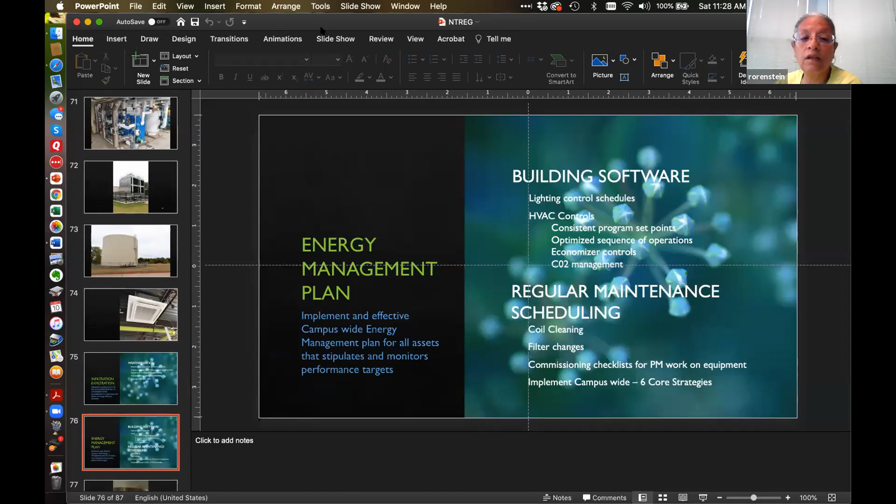Melon asked a question regarding reflective roofs and white roofs and the efficiency. You actually presented that as part of the reconditioning or the remodeling you did at Good Work. But you want to talk about that a little bit more, about how much additional efficiency is gained by going with cool white roofs? There's been a lot of discussion on that in the community.

Yes, it does - there is a benefit to using a white roof by reflecting the energy. It needs to be coupled with increased insulation to truly be effective. But a white roof alone can reduce the energy demand. Take for example, A&M did this study a long, long time ago - in the 60s, I believe - and that's where they determined that 70% of the heat gain that comes into buildings, this was in Texas, is from the roof. Providing a thermal siphon roof or a reflective roof that has high emissivity, you can reduce that heat gain close to like 75%. That much can be offset just with that reflective roof surface. So then you just insulate against the differential, and that's what makes the real difference.

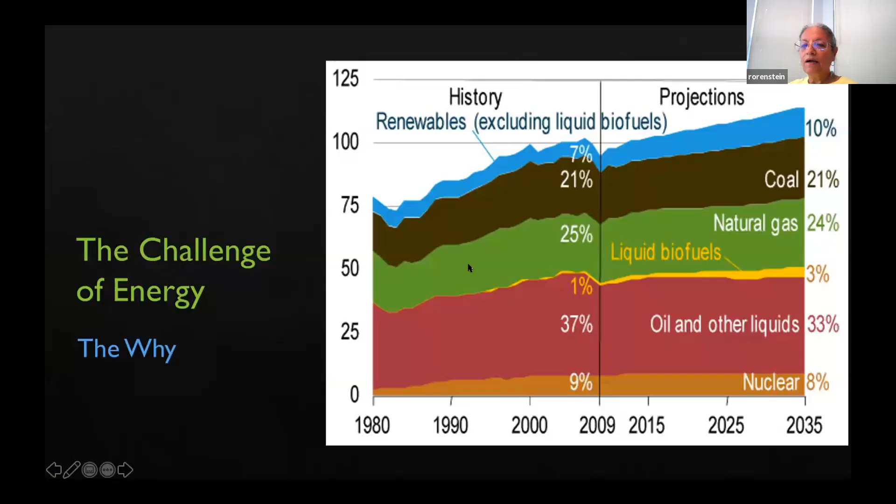Michael, do you want to stop the recording? I will, I'm listening. Thank you.